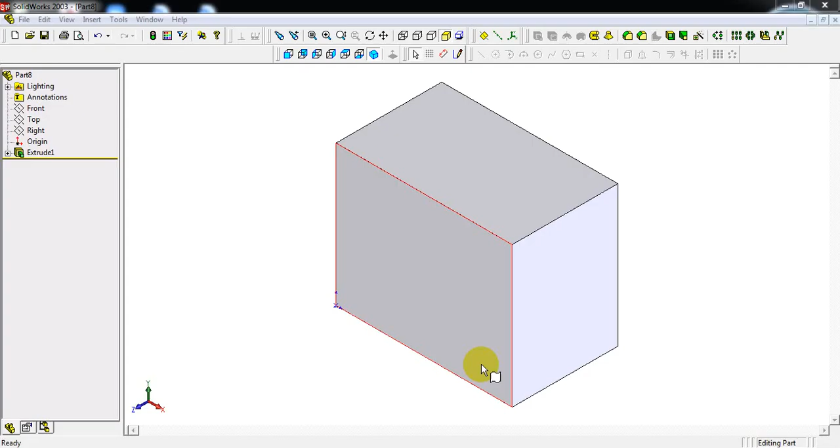In this video, I am going to explain how to do the isometric component for the given orthographic projection. So this is the orthographic projections - this is the front view, top view and side view. In front view we can see length of 110 mm, height of 80 mm.

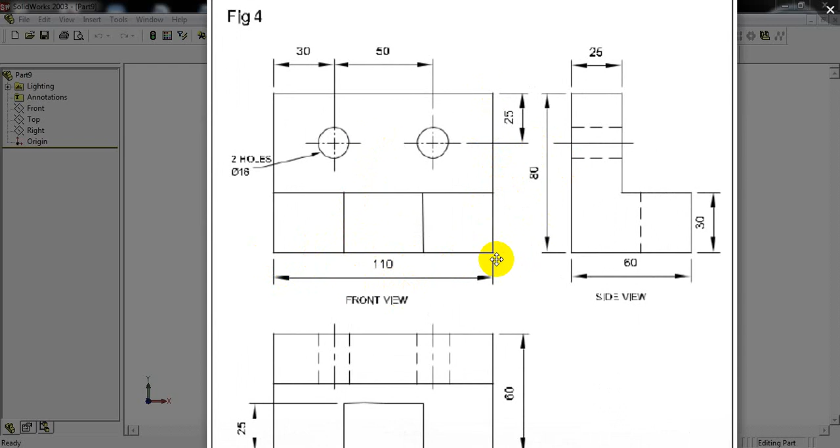First let us draw a rectangle of length 110 and height 80 mm. Select sketch, take rectangle command. From origin point, draw one rectangle. Make dimension of length 110 mm. Height of 80 mm.

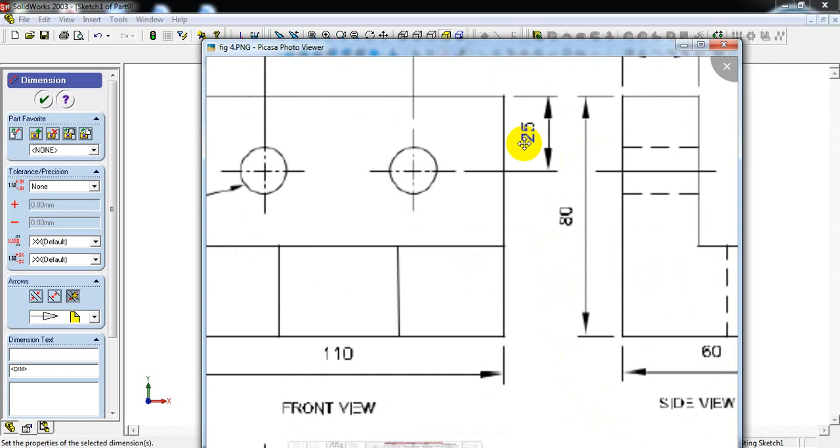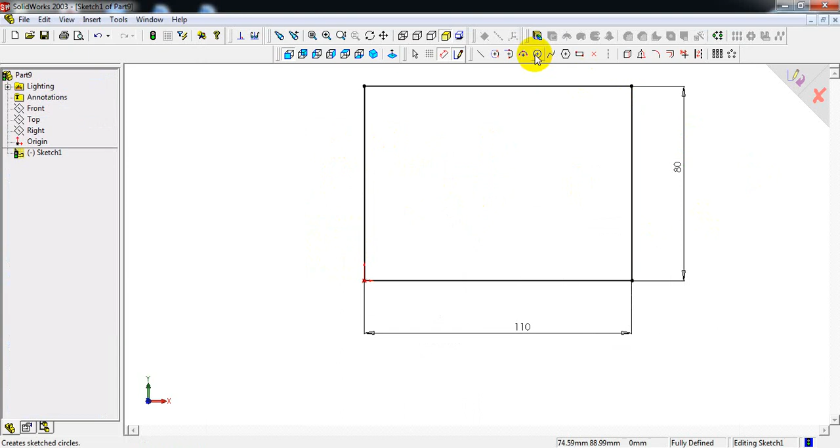Now, in this step only, we shall draw these circles of two holes, diameter 16, as per the given dimension. Select circle, draw two circles of approximate dimension. Now do the dimension of the circle - specified a diameter of 16 mm for two holes. Enter 16 mm. Do the dimension for the second hole and it is also 16 mm.

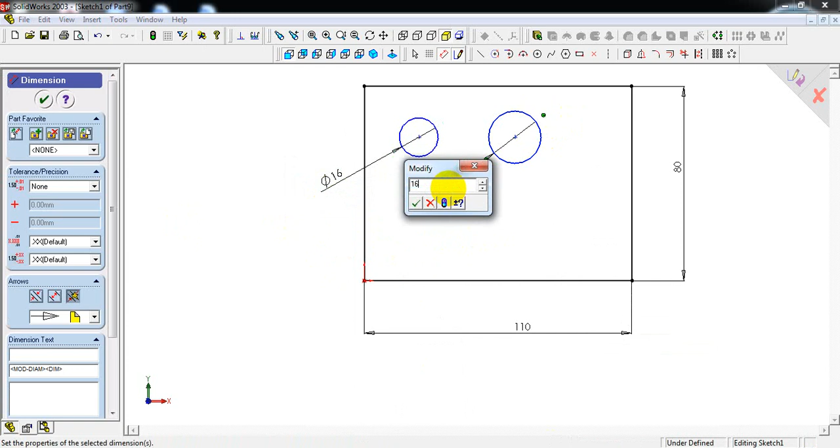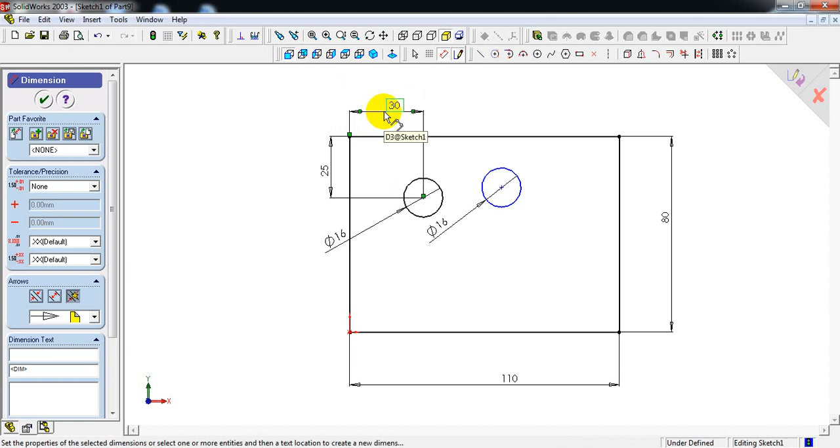It is placed at a height of 25 mm. Enter 25. Next, distance from edge to here it is 30 mm, circle to the edge. Distance between both the circles is 50 mm. And we have to do the dimension for this circle also, of diameter height 25 mm. Okay, this is as per the given dimensions.

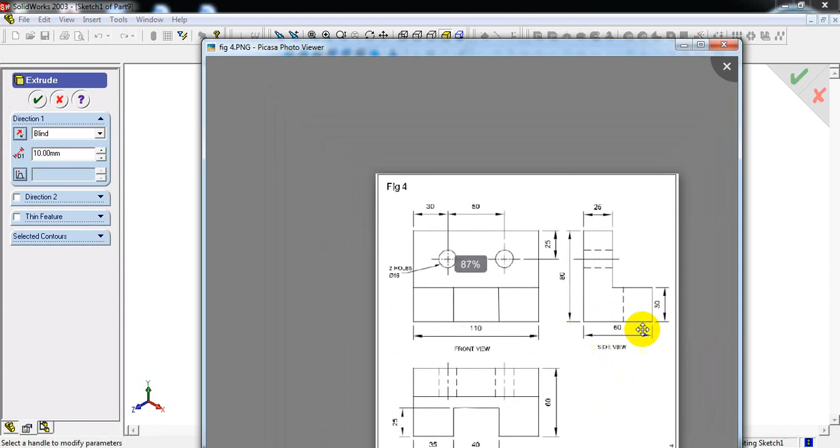Now select isometric view, extruded boss base, a width of 60 mm. In the side view and in the top view we can see the width, that is 60 mm. Enter 60 mm.

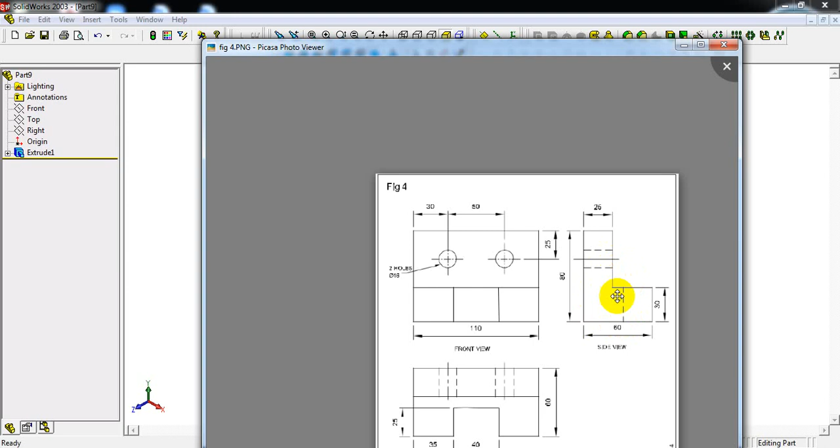Next, in side view it is in the shape of L. We have to cut this portion. Draw one rectangle from the corner and cut this rectangle. This is a left side view. Here select left view, left face, sketch rectangle command. From this corner, draw one rectangle. Make dimension.

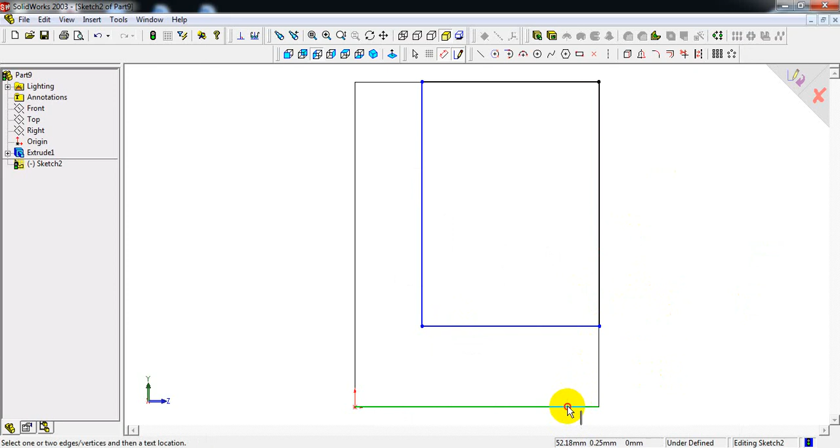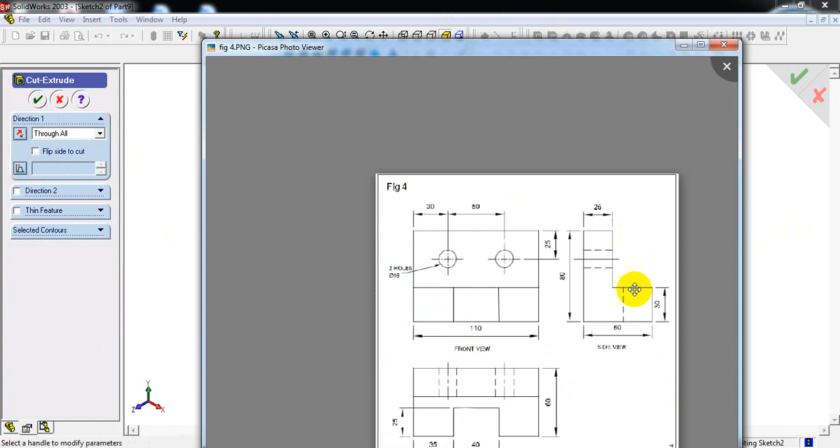Distance from this edge to this line is 30 mm, edge to this rectangle line. And this edge to this line is 26 mm. Enter 26. Now cut this rectangle - extrude cut, select through all. It has cut throughout this portion. Select OK. So this is the left side view.

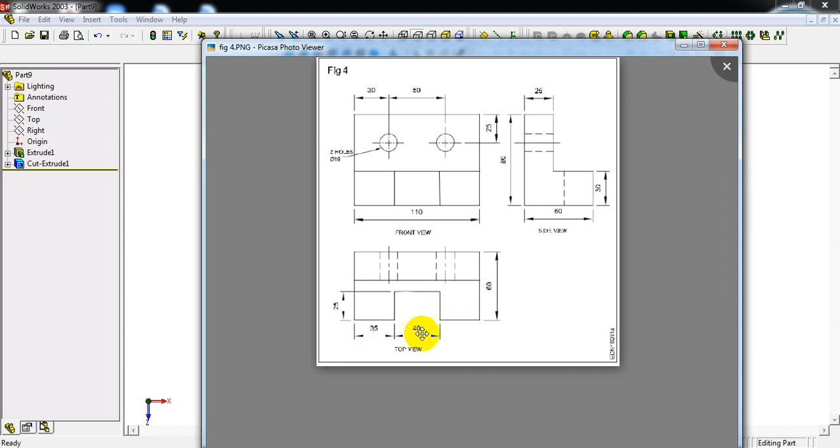It looks like this. This is the front view. In the top view it looks like this, but in the figure it is in this way - it has cut a portion of rectangle 40 into 25 mm at a distance of 35 mm.

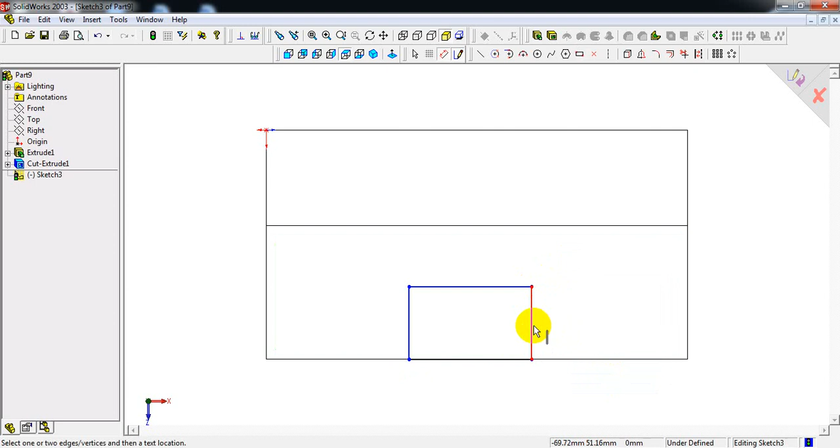Select top face followed by top view, sketch rectangle command. From this edge, draw one rectangle, make dimension. This is 25 mm, enter 25. This is 40 mm, enter 40. Distance between edge to this line is 35 mm, edge to this line is 35 mm.

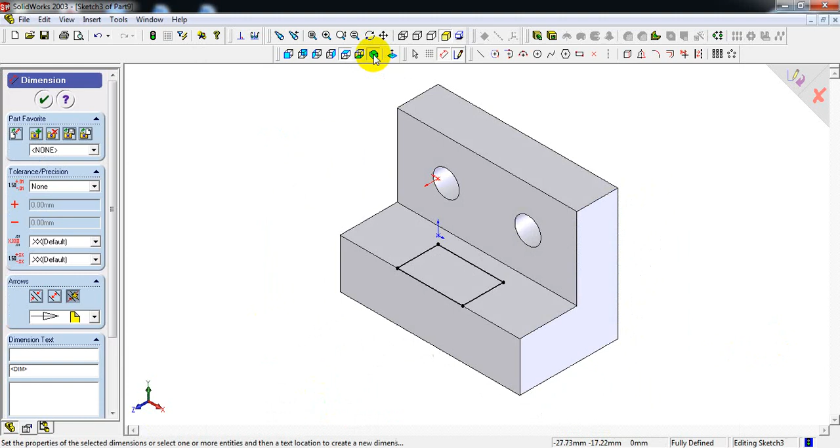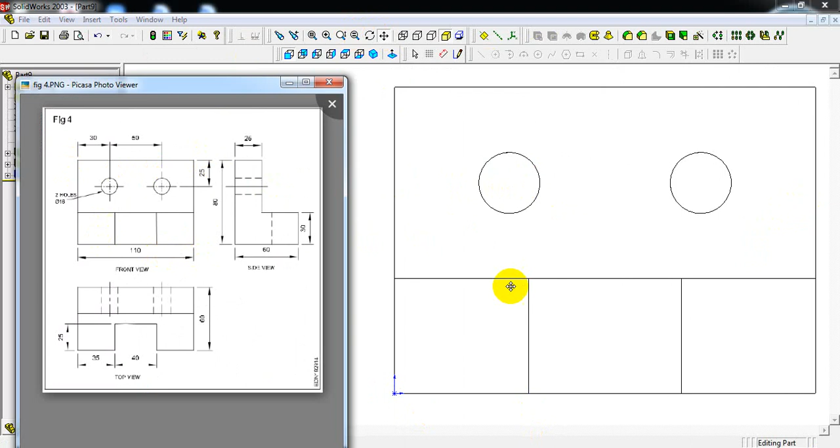Isometric view, extruded cut, select through all, select OK. See, this is the front view - in front view it looks like this. Okay, in front view it is looking in this way. So this is the top view, with hidden line visible.

Next, left side view. In left side it's looking like this. Do the dimension. Finally, select dimension and do the dimension.

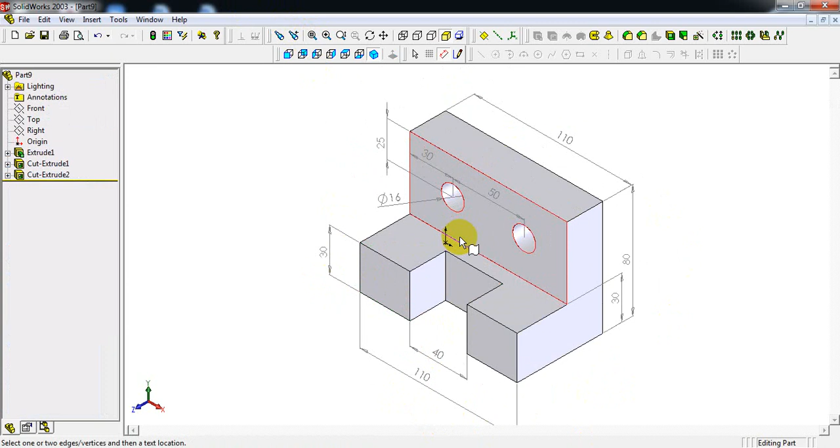So these are the given dimensions. Finally, width...